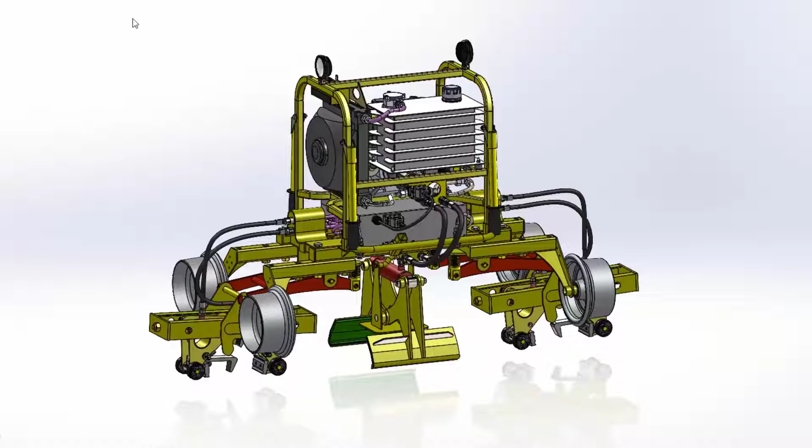SOLIDWORKS sheet metal and structure systems have new enhancements in 2023 that enable smoother design to manufacturing workflows and speed up tedious tasks. This track setter machine has a hydraulic guard that needs to be extended to further protect these couplings from heavy equipment and falling debris during operation.

Opening the sheet metal part, we can easily extend the front of the part 2 inches to cover the coupling, but notice when making this change, a warning popped up in the tree. New for SOLIDWORKS Sheet Metal 2023, sheet metal specific sensors can be created to dynamically warn you if the flat pattern of the sheet metal part exceeds width, length, area or bounding box area blank values.

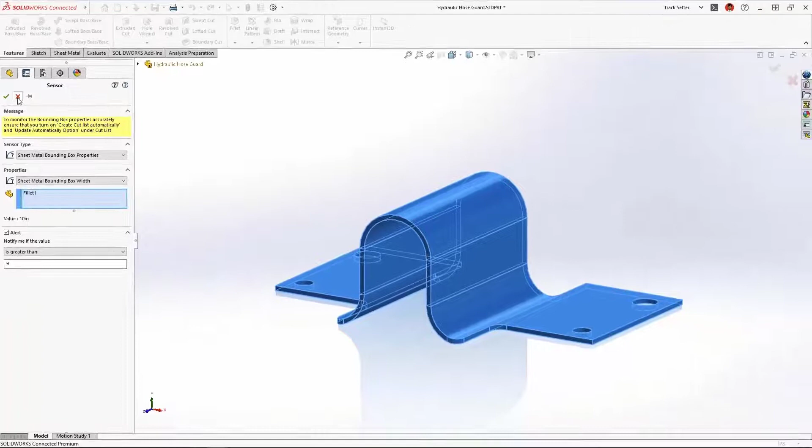This new feature saves redesign time and catches costly mistakes so your sheet metal parts will sail through manufacturing. By reducing the outer dimension of this part, the warning goes away.

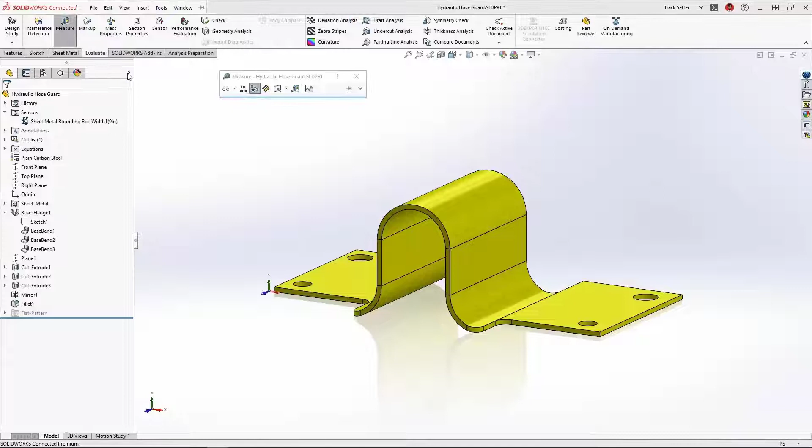When this part was originally created, a sketch was used to create the initial base flange where all bends were dimensioned equal. But when accounting for material thickness, it results in different radii for the inside and outside corners, and that's a problem for manufacturing, since this requires additional machine setup. Now in SOLIDWORKS 2023, we can choose the new symmetrical option, which will ensure an identical inside and outside resultant bend radius.

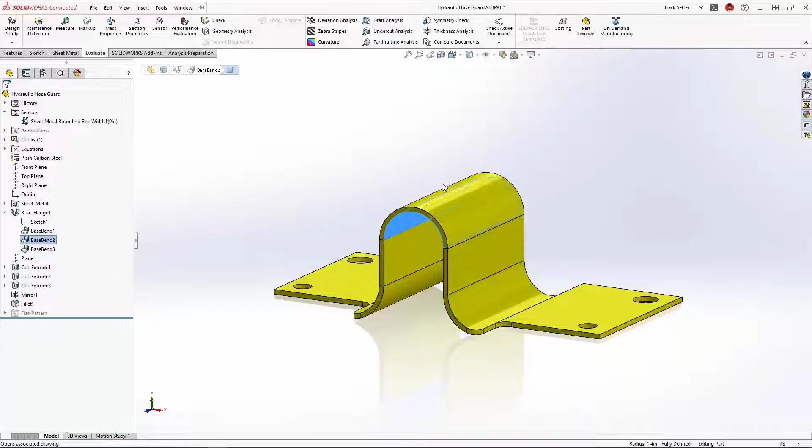We used the gauge table for this sheet metal part, and now in the drawing, the gauge value can be added directly to the cut list properties, preventing the need to create any global variables or equations.

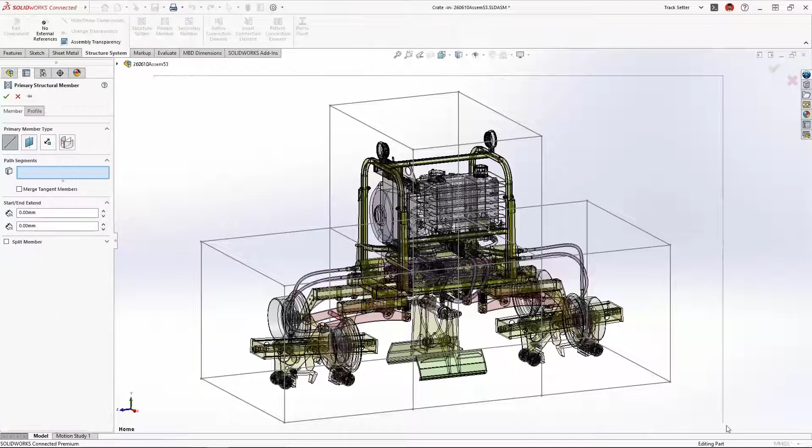As we're preparing to ship the machine, we'll need to build a sturdy, reusable shipping crate to prevent damage while transporting from job site to job site. SOLIDWORKS Structure Systems was used to build the steel crate from a combination of 3D sketches for primary members and reference planes for secondary members.

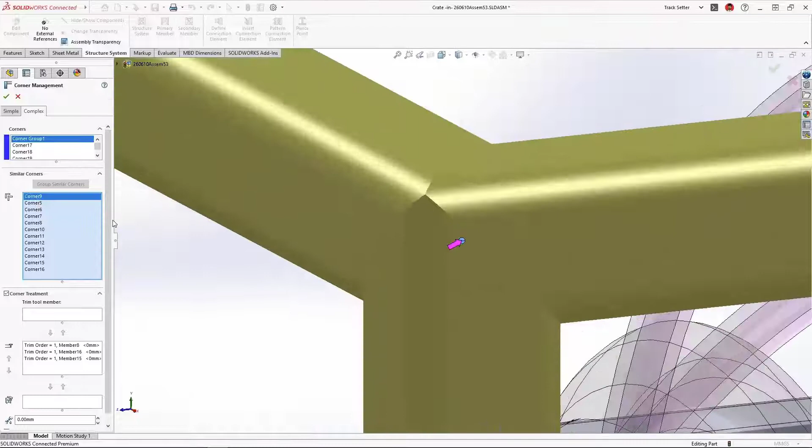By default, all of these corners are mitered, which is great for some applications, but for this crate, we'll need to change the corner treatments to make it easier to build. New in SOLIDWORKS 2023 structure systems, we can now automatically group similar corners to apply the same corner treatment. These purple arrows identify which corners will belong to the group. Using the new Zoom to Selection command, we can verify that the trim order is exactly what we want.

To strengthen the corners, we'll add a connection element like this gusset. New in 2023, these can be patterned to similar corners. Again, the purple arrows identify where the pattern gussets will go, automating the structural design process and saving time.

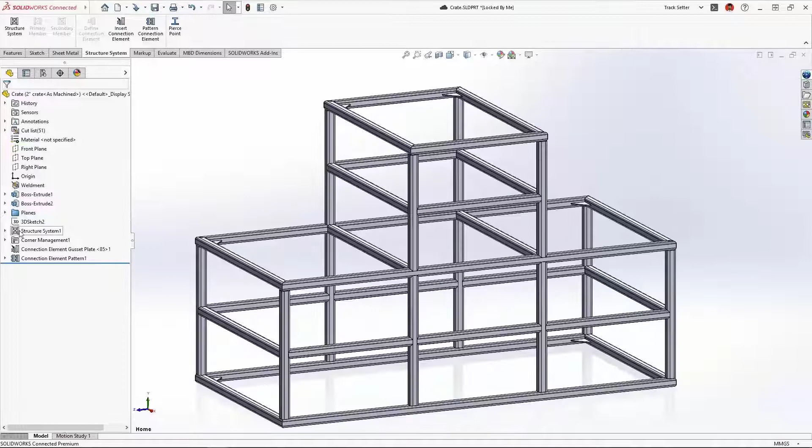We may want to build a more durable crate with larger square tube stock. New in Structure Systems 2023, we can now change the weldment profile for a select set of members and save that to a unique configuration.

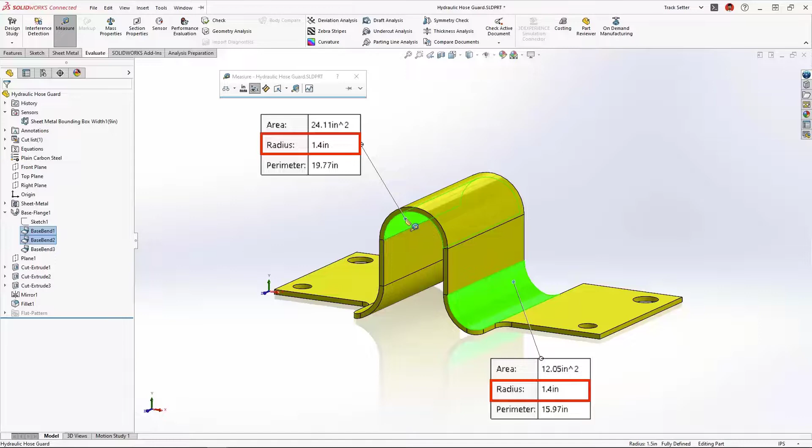SOLIDWORKS Sheet Metal and Structure Systems in 2023 accelerates your design to manufacturing workflow and adds new features that every shop floor operator will enjoy. And when you connect your designs to the 3DEXPERIENCE platform, sharing your work with other users or across teams is easier than ever.